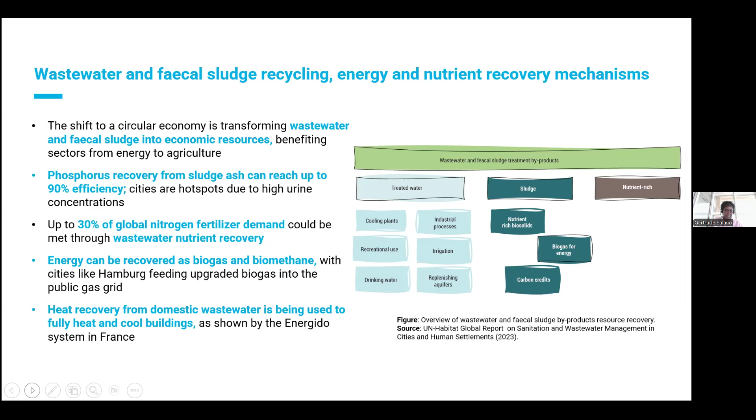So the report has clearly mapped out the byproducts that are affiliated to wastewater and fecal sludge treatment. And this is clearly illustrated in the figure on the screen, which is actually evidencing the shift that we now have. We are moving to a circular economy that seeks to transform wastewater and fecal sludge into economic resources, benefiting several sectors, including energy and agriculture. And a good example is from Hamburg City, where energy is being recovered as biogas and biomethane, and we'll have this presented as a case study after this presentation.

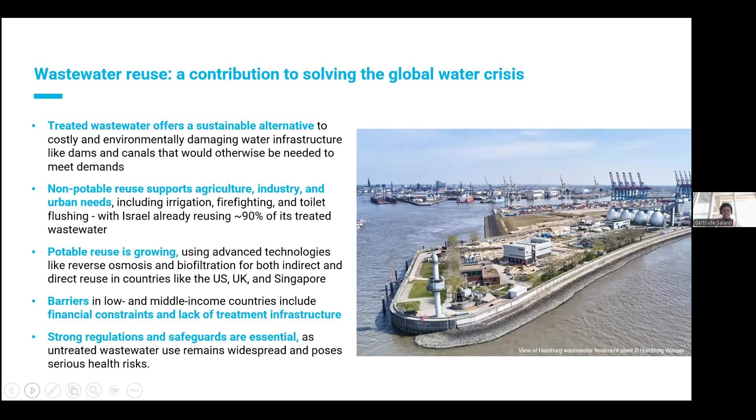And unfortunately, potable reuse adoption still remains low or non-existent in low and middle income countries, and this can be attributed to existing barriers like financial constraints and lack of treatment infrastructure. But it's worth noting also, untreated wastewater, yes, remains widespread, but also it's characterized by health risks, and thus strong regulations and safeguards are very essential to guide this. Next slide.

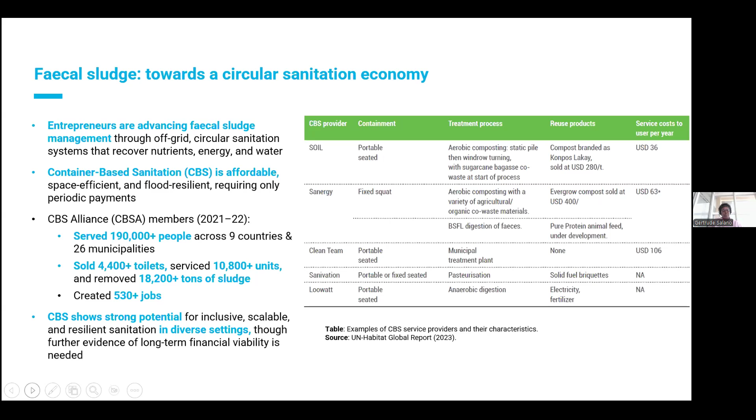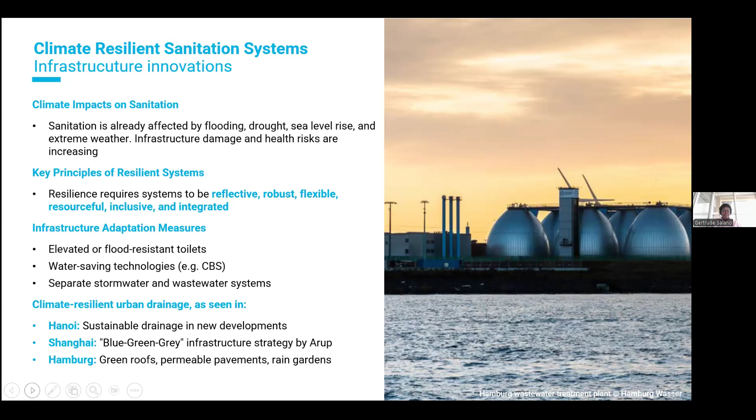So the report outlines key principles that chart how we move into resilient systems, besides infrastructure adaptation measures, which include elevated or flood resistant toilets, especially in flood prone areas, and using water saving technologies like container-based sanitation, and good practices like climate resilient urban drainage, which are found across cities in the world, Hanoi, Shanghai, and Hamburg. So we will have a case study from Hanoi to give great insights on the same. Next slide.

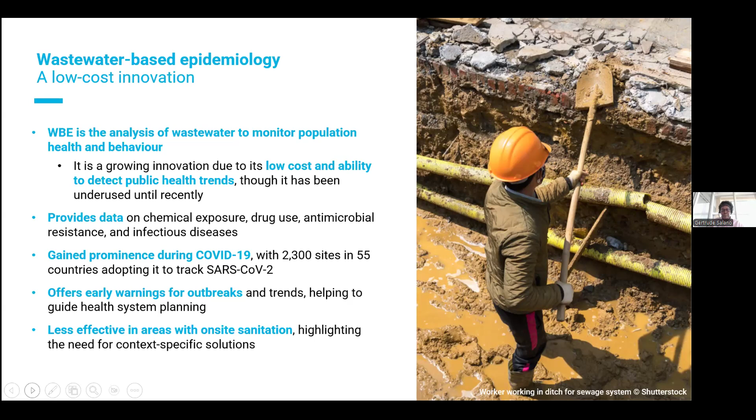Now I will look at the innovations around wastewater management. And one such innovation is wastewater-based epidemiology, where we're analyzing wastewater and really seeing how it is interacting with population health and behavior. And glad to report that the World Health Organization has offered guidelines on this, and Kate will actually give further insights on the same later on in the presentation. Next slide.

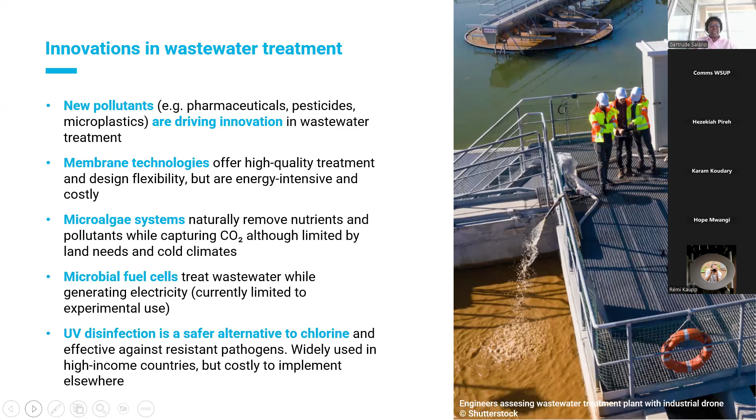And then three, I have talked about climate resilient infrastructure, and the report confirms that this is gaining traction, and this includes having flood resistant or climate change shock responsive infrastructure and systems.

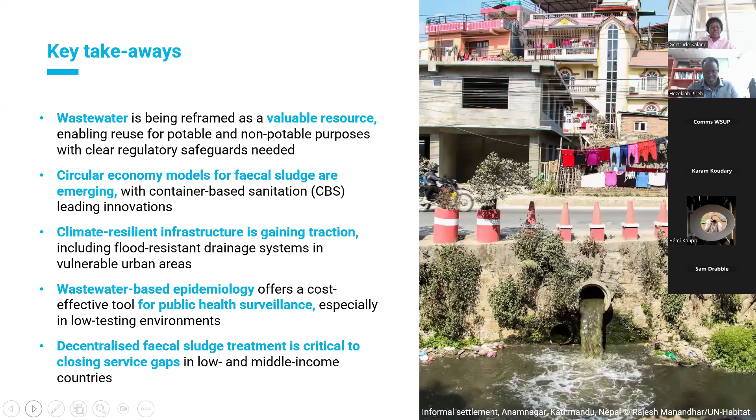And then wastewater-based epidemiology is also an innovation that is coming in and offering a cost-effective tool for public health surveillance, especially in the low testing environment. And then lastly and conclusively, the report has alluded to the fact that decentralized fecal sludge treatment is critical, especially when it comes to closing the service gaps for the low and middle income areas.

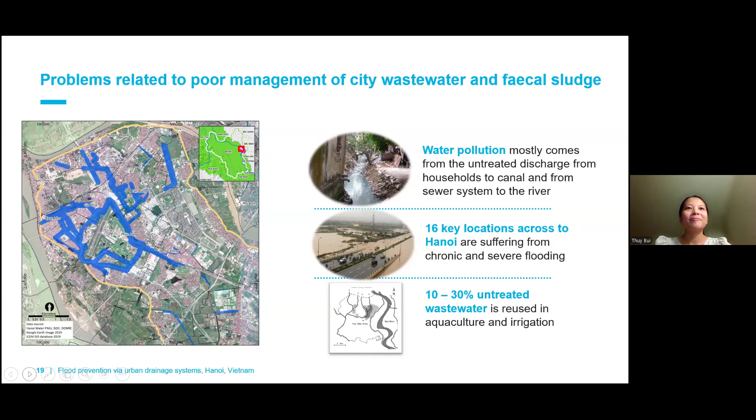Several solutions have been implemented in the city, focusing on the efficiency of wastewater and sanitation management, deploying the sustainable urban drainage system with the approach of source control and pathway control. In addition, we are also focusing on wastewater reuse in a more proper way, to make sure that it's safe to reuse in aquaculture and in agriculture. Also, we are taking into account the responsibilities of multiple stakeholders. More detail is coming up on the next slide, please.

The mode of action on efficient wastewater and sanitation management can be addressed by managing the sewer and on-site sanitation for the existing system, categorizing the different functions and roles of the different stakeholders, from the household to the private company to the community to the people's committees. And learning from the past, Hanoi is expanding, so we need to build and focus on the separation of the sewerage system for the new urban areas to better manage stormwater for flood mitigation. So next, please.

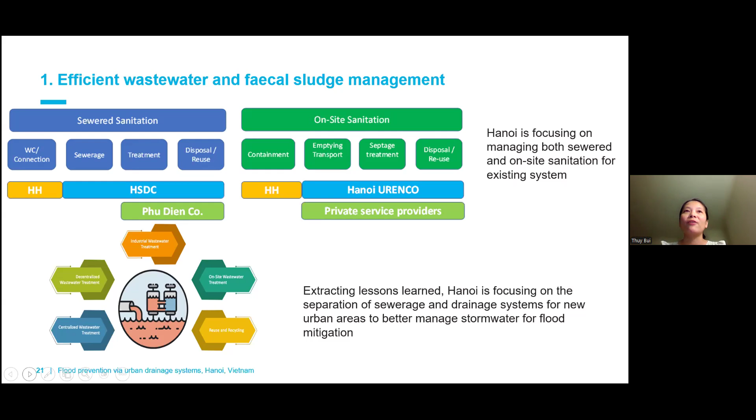So the City of Hanoi is implementing the sustainable urban drainage system using the source-pathway-receptor approach for flood prevention. Regarding source control, we are focusing on rainwater harvesting and storm collection at both micro scale and macro scale. The pathway-receptor control mainly relies on improving the drainage system by constructing pumping stations and the rainwater drainage system, as well as applying innovative technologies in the wastewater treatment facilities. So next, please.

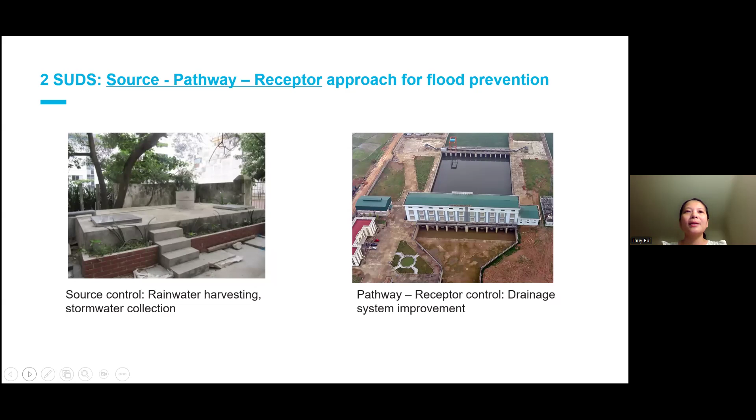As I mentioned earlier in this presentation, untreated wastewater has been reused in aquaculture and agriculture without any treatment, and it can cause potential dangers and health concerns for the users. So we are putting the farmers and fishermen in the position of making decisions, and training them on reusing the wastewater, focusing on water quality and how to reuse it safely in aquaculture and agriculture.

We are also receiving a lot of support for wastewater reuse in national level policy, and it has been mentioned in one article of the Law on Environmental Protection 2020. This is very, very important. It has been upgraded from the Law on Environmental Protection 2014. And another solution we are trying to put forward is to include wastewater reuse in the development plans of the cities.

Regarding the responsibilities of the stakeholders, we would say that all levels are involved, from the top down, from top-tier local government to the people's committee, to private organizations, companies and partnerships, and also to the household and ownership of the systems. So next, please.

We also got some support and recommendations from the World Bank to target Hanoi as a city free from water pollution and flooding, by applying different activities focusing on infrastructure, institutional and regulatory measures, to achieve better wastewater treatment and better sanitation management, and also reduce flooding in the urban areas. So next, please.

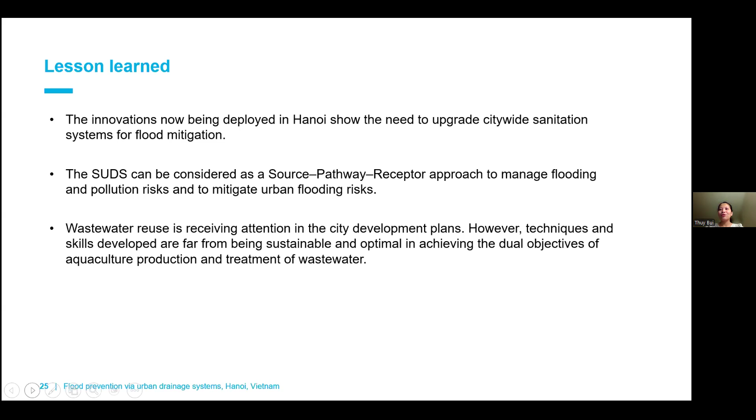So let's go into the second question, if we can bring that up. And this is building both on Gertrude's presentation and then on Thuy-Bui's case study from Hanoi, which is also detailed in the global report. So select all correct answers from these three. Statement 1: rapid runoff from concrete surfaces increases the risk of flash floods and landslides damaging infrastructure. Statement 2: higher temperatures and changing precipitation patterns have no effect on wastewater and fecal sludge management. And finally, cities should prioritize climate change mitigation over adapting sanitation infrastructure.

I give you just a few seconds to absorb those three statements and select all of those that you think are correct. Okay, if we can now bring up the responses. Okay, so rapid runoff from concrete surfaces increases the risk of flash floods and landslides. That is true, and we've heard from Thuy-Bui around sustainable urban drainage systems as one potential response. The second statement, higher temperatures and changing precipitation have no effect on wastewater and fecal sludge management. That is indeed false. Higher temperatures and precipitation can affect treatment processes. They can also increase pathogen survival in water sources.

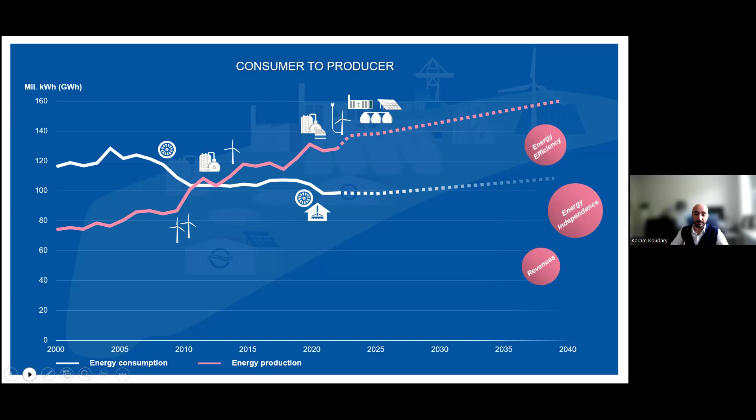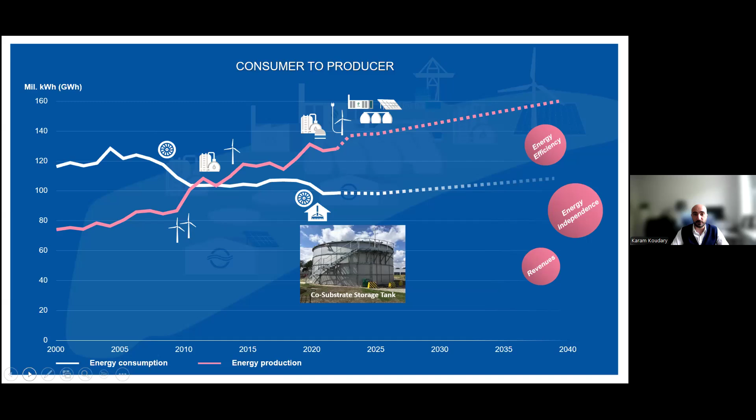These measures combined have enabled our plant to transition from being a major energy consumer requiring around 100 gigawatt hours per year, which amounts to, just for a bit of context, around 5 million euros per year for the electricity bill, to achieving near energy autarky, so near energy independence, where we now generate 130% of our demand per year, of course as an average value throughout the year, because we still need to rely on an external electricity supplier during maintenance activities, which amounts to up to 10% of our demand. Next slide, please.

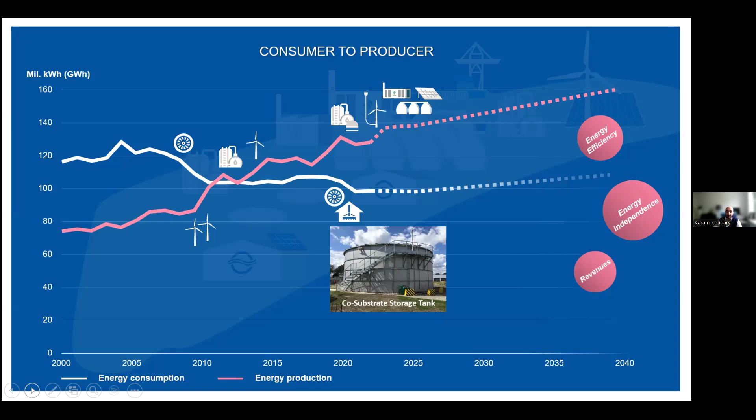So this plant is currently undergoing trial operations and expected to go fully operational by 2026, if everything goes according to plan, which positions Hamburg Wasser at the forefront of sustainable resource recovery in the wastewater sector.

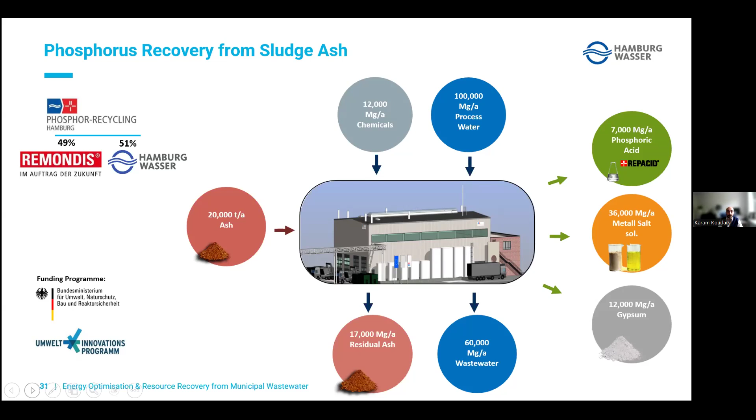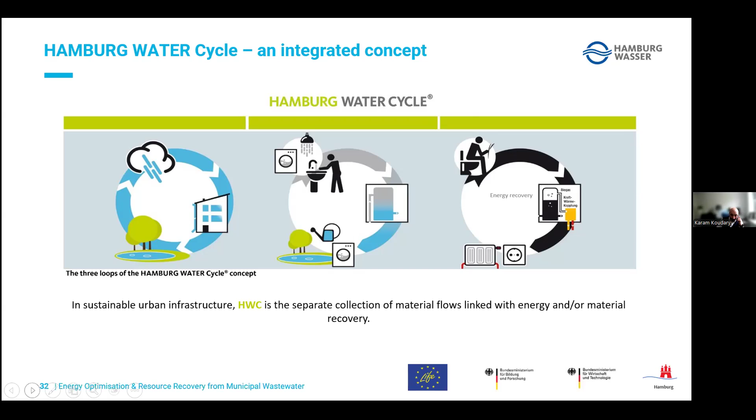So rainwater is naturally uncontaminated, gets polluted over the runoff. Grey water, next click, please. Again, yes. As you can see, grey water is from household sources, excluding toilets, lightly contaminated and low in organic matter; black water from toilets, rich in organic matter and nutrients.

And the system applies vacuum technology to separate everything on site and forward it directly into an in-situ plant, which treats the grey water and the black water separately to produce biogas, and via CHP also produce local heating as well as electricity. So the achieved goals are the separation, reduction of CO2 emissions, approximately 400 tons per year,

and we generate both thermal energy, approximately 250 megawatt hours per year, as well as electrical energy, and we can reach up to 70% water savings via this vacuum technology. This is also, of course, a flexible and decentralized system adaptable to your urban needs. Thank you.

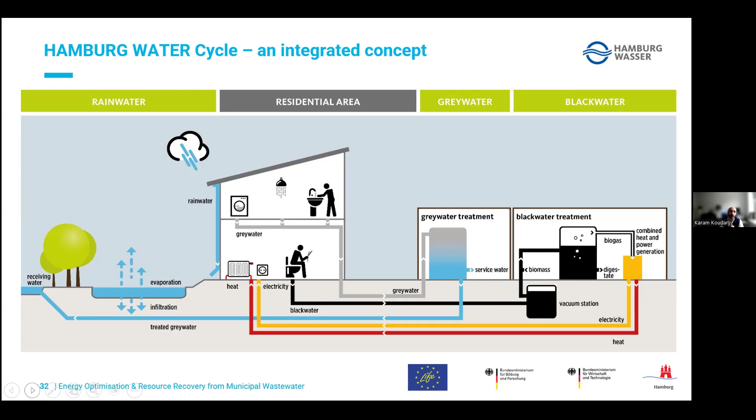Thank you very much, Karam, and you have kept the time, and I know that some of these issues will also come up in the expert panel that we are having now. So we are now joined by 4 distinguished panelists. I have introduced Karam and Tui, and let me now introduce Kate and Remy.

So Kate is the sanitation team leader within the WASH team at WHO. In her role, she is responsible for translating health evidence to policy and practice through WHO guidelines, and for health sector collaborations where sanitation is a critical component of risk and disease control. Kate led the WHO guidance on environmental surveillance for COVID and is investigating potential for multi-pathogen surveillance.

Remy is the Executive Director of the Container-Based Sanitation Alliance. For those who are not aware, this is a coalition of innovative sanitation operators, and Remy has 20 years of experience on urban issues and sanitation, especially focusing on supporting social enterprises, developing innovative finance models, and finding what can possibly work for people living in informal settlements. Very important background captured in our global report also.